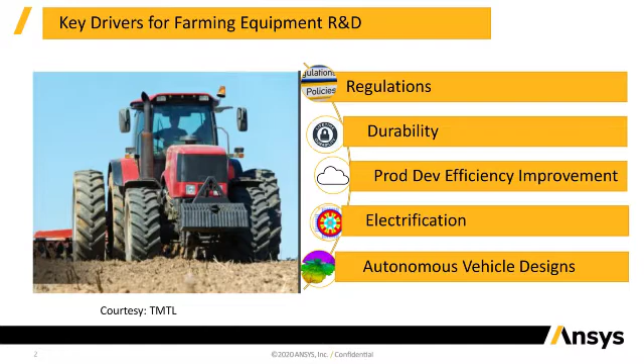Today I am going to cover innovations in product development for farming technologies. The key drivers identified for farming equipment R&D: first is regulations, designed to be updated based on regulatory norms like fuel efficiency and passenger safety. Second is durability, which plays an important role in minimizing warranty claims. Third is reducing product development cycle to gain competitive advantage. Fourth is electrification, which is picking up to replace the IC engine to meet new emission norms. Fifth is autonomous vehicle designs, which increase passenger safety and avoid repetition of tasks.

The first key driver is regulations. There are two different aspects: one is fuel efficiency and noise, second is safety. The key challenge is 40% reduction of particulate matter from BS4 to BS5 emission norms, along with increased fuel efficiency and reduced noise levels. ANSYS has solutions to increase fuel efficiency by optimizing the combustion chamber.

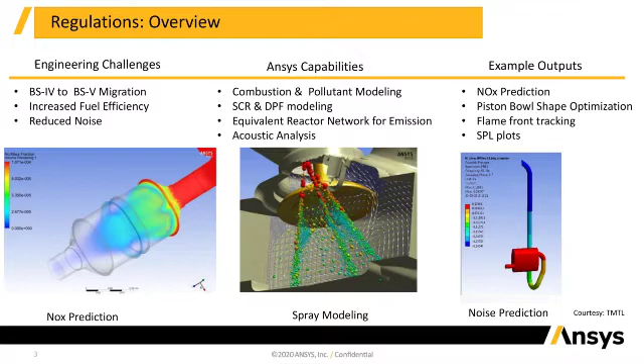We also offer a wide range of solutions for design of after-treatment devices like SCR and DPF to meet regulation norms. A third important aspect is we offer many solutions for acoustic simulations to predict noise levels in assemblies as well as in components like mufflers.

Here I am showing the case study of a muffler noise study for tractor application developed by TMTL, whose objective is to trade off between back pressure and transmission loss. We use ANSYS Mechanical to perform acoustic harmonic analysis to simulate and maximize transmission loss, and we use the computational fluid dynamics solver Fluent to perform fluid analysis to predict the back pressure of the muffler.

What we identified here is experimental results obtained from a prototype muffler based on the optimized ANSYS design correlated well with experiments. The benefits the customer received: it reduced design cycle time from 20 weeks to 8 weeks, as well as reduced cost of manufacturing by 40%.

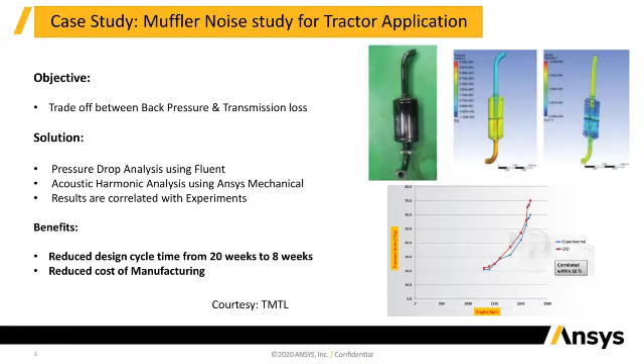Another aspect of regulation is physical safety. The main challenge is to meet regulatory requirements and minimize destructive testing. To meet these challenges, ANSYS offers rollover protective simulations as well as falling object protective simulations to make robust and safe designs before actual testing.

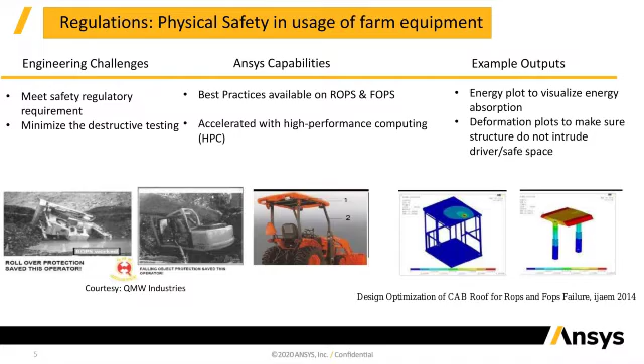We also provide high performance computing options to accelerate virtual testing. It helps decision making by visualizing outputs like energy, stresses, strains, and deformations to make sure the structure does not intrude into driver space. I'm showing ROPS and FOPS testing on agriculture tractors, done by one of our customers.

Their objective is to virtually test the tractor according to code 4 and code 10 prior to official test approval. These codes specify certain testings which need to be done in sequence to predict the energy absorbed by any rollover protective structure or falling object protective structure. The sequence is: first loading is longitudinal loading, second is rear crushing, third is side loading, and fourth is front crushing.

After performing all these testings, they could plot the energy for each and every loading option, and compare these energy levels and deformation levels with experiments. What they found is the results are quite well validated against the experimental results.

The second important key driver is product development efficiency improvement. The key challenge is to reduce product development cycle time, enable collaboration across multidisciplinary teams, and address constraints on hardware availability. As ANSYS, we provide process automation options through ACT, which is also called the ANSYS Customization Toolkit.

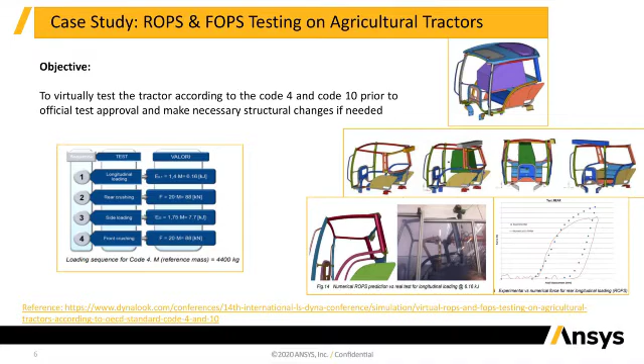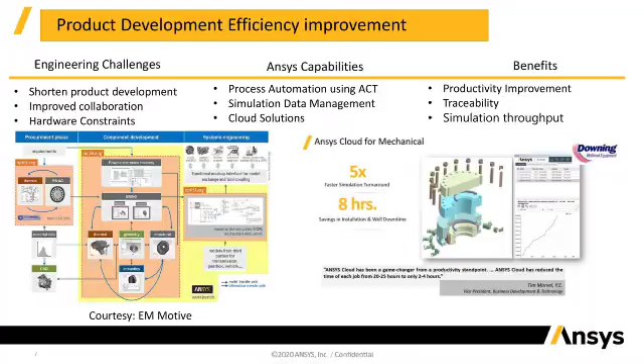We also provide improved collaboration through platform solutions like Minerva, and remote hardware access through cloud computing to mitigate these challenges, which in turn helps customers in productivity improvement. A second important aspect is traceability as well as simulation throughput.

I am presenting here engineering productivity improvement using ACT, developed by one of our customers, Robert Bosch. The key engineering challenge is to improve the ECU's structural and thermal reliability.

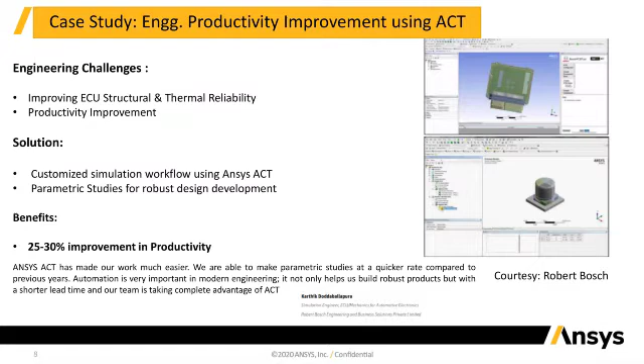They performed a customized workflow simulation using ANSYS ACT and found that pre-processing and post-processing time is reduced by close to 30%. They performed a complete automation study using ANSYS Mechanical and achieved a significant improvement in productivity, close to 25 to 30%.

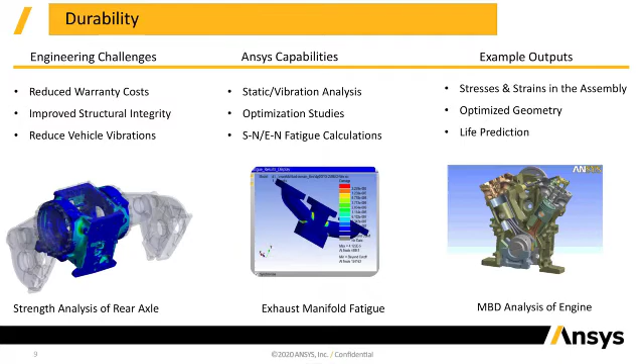The next important driver is durability. The key challenge is to maintain structural integrity, minimize vibrations, and reduce warranty claims throughout the life cycle. ANSYS provides options to perform stress, vibration, fatigue, and optimization simulations to improve the life of vehicle components. Here I am presenting a case study on durability analysis of an engine developed by one of our customers.

This customer, AGCO, had the objective of having cost-effective and robust agriculture equipment. They used ANSYS Mechanical for performing nonlinear simulations to predict stresses in the assembly. What they found is their results were quite validated against experiments, even at the bolt locations.

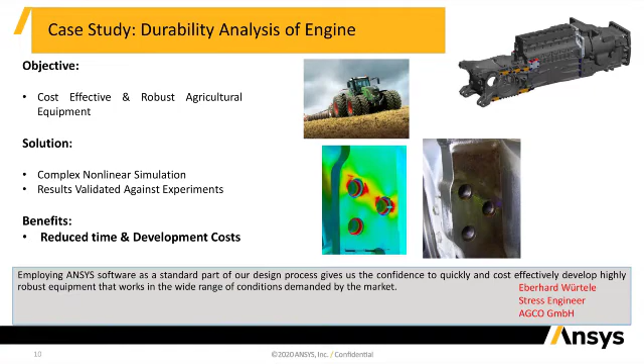Torque speed and efficiency maps are very critical in the design of traction motors. Prediction of electromagnetic losses plays a major role in the thermal management of the motor. Electromagnetic and thermal analysis using ANSYS helps in optimizing the size and shape, as well as enhancing reliability of various motor components.

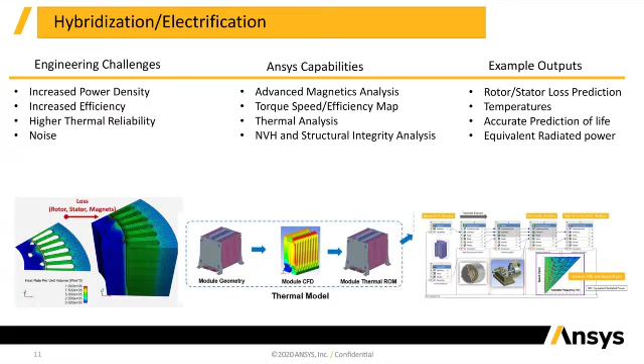Next, the most important element in electrification is the battery. Range, charging, discharging characteristics, life, safety, and cost are very critical. Pack and module level thermal management can be validated well using ANSYS simulation. The battery management system plays a major role in the performance of the electric vehicle, thermal cooling, safety, and efficiency.

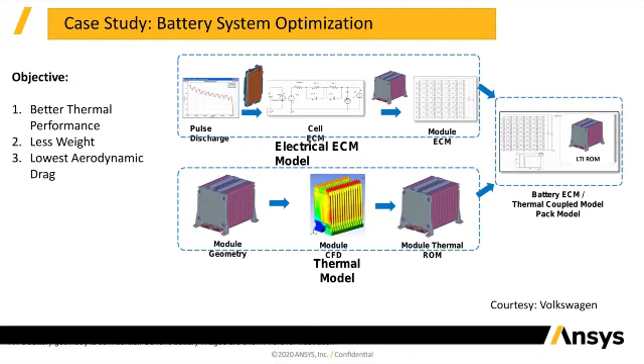Here I am showing a case study about battery system optimization performed by Volkswagen. Their objective was to achieve better thermal performance, least weight, and lowest aerodynamic drag. They considered the battery module plus battery management system, which includes power electronics, and performed a complete thermal analysis, predicting that the battery system was optimized to provide enough cooling for the race duration with the least weight and lowest aerodynamic drag.

The last driver is innovations in autonomous vehicle designs. The key engineering challenges in designing autonomous vehicles are different weather and lighting conditions like raining, snowing, night, and glaring. There are also infrastructure challenges like fencing, reflective surfaces, and animals or objects, and a third important aspect is the drive, find, fix barrier scenario.

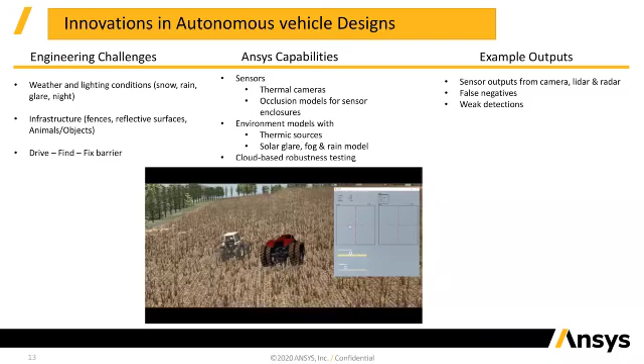Many technologies need to be included to meet these key engineering challenges. Physical testing for different conditions might not be a feasible approach. Simulation-based models or environments can help us cover all the possible scenarios. To create different virtual simulation environments, more accurate modeling of sensors and environmental conditions is important.

ANSYS has the capability to model different sensors like thermal cameras, LIDAR, and radar, and environmental models like thermal sources, solar glare, rain, and fog conditions. ANSYS can give you output information like Doppler velocities, camera or sensor information, false negatives, listed objects, and weak detections.

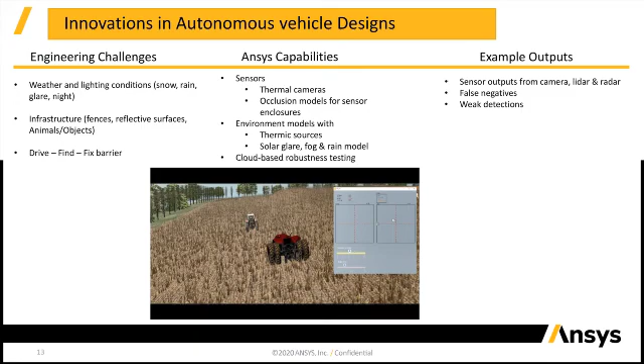In this picture, we are showing two different tractors: one driven by a driver, another one an autonomous vehicle. The moment it sees an object, it immediately applies the brake based on the camera information. This is the beauty of autonomous vehicles.

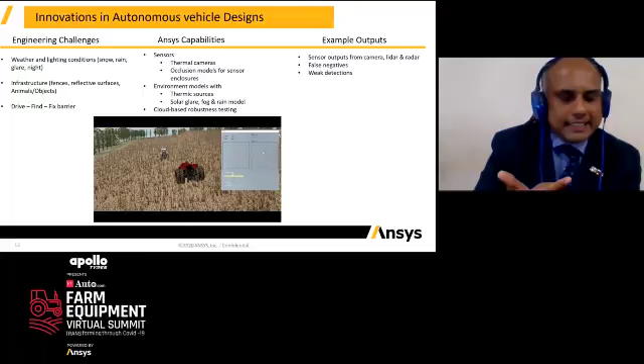I am summarizing the content. ANSYS can help customers in reducing product development time by 40%. ANSYS process automation capabilities help customers improve productivity by 25 to 30%, and reduce product development cost by performing durability studies. Better thermal performance is achieved for battery thermal studies, as we have seen in the Volkswagen case study.